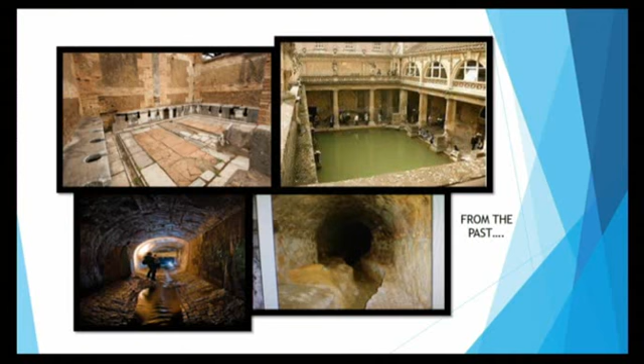Plumbing dates back a long time. As you can see in some of these pictures, the Romans were some of the first people to have a plumbing system. On your brochures, the one on the left is probably a public bathroom they would go into, and the top right would be more like a Turkish bath. The bottom two are some of the sanitary sewer systems - the one on the left is over in England, and the one on the right is the Romans. I can't date that for you, but it looks like they have a trough there to help move things down to a river, which would then get rid of it.

Up to the future - we've come a long way since the Romans to the present time. Who's to say what the future will bring? We have faucets now that you only touch, and some toilets now that you can just wave your hand over and they will flush. So we've come a long way since the Romans.

But plumbers do protect the health of the nation through sanitary and potable, clean drinking water. Our primary concern in our division is the safety aspects of the plumbing system. This covers a wide range of items, from proper venting of each fixture to the proper drainage of the whole plumbing system in every building, house, and dwelling.

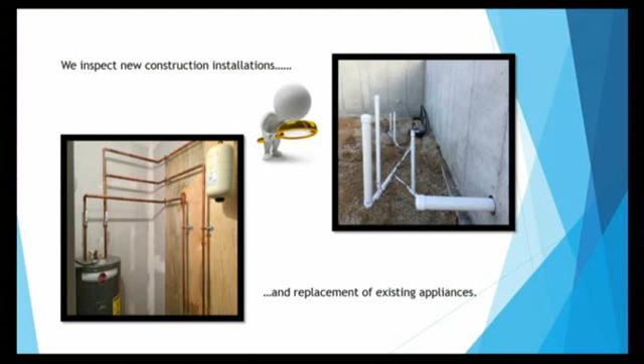On replacement fixtures, I got a water heater there on the left. That's actually a marathon water heater, and they're usually 80 to 100 gallons.

We check for combustion air on water heaters and mechanical rooms, especially on gas water heaters. If there's not enough combustion air in that room, the appliances will not run properly. They'll give off more carbon monoxide, and it will also reduce the life of that appliance.

We also inspect tubs on replacements, and for new faucets installed on tubs and showers, we have to check the temperatures, because all new housing bathrooms, bathtubs, and showers are limited to 120 degrees.

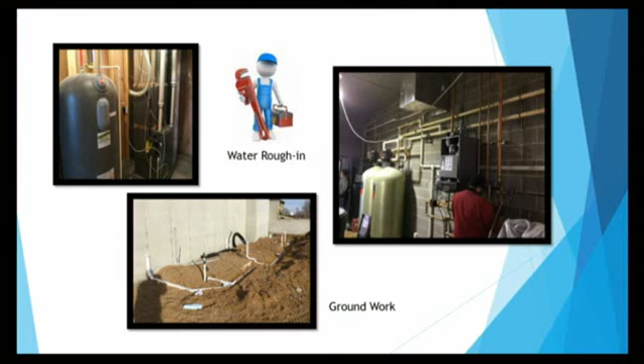With those new faucets, they have a device built into them so that they will do that. On new construction, the maximum temperature controlled by the water heater is a maximum of 140. So if you have 130 at your water heater, these devices will knock it down below that 120. This is to prevent scalding for children and the elderly.

We do not inspect replacements of dishwashers, or if you change out a sink or a toilet. However, if you move them, then we do. So if you add another sink, or move the stool from one part of the room to another, we have to come out and inspect it before it gets covered up. That would require an inspection.

Most of the mornings consist of phone calls with contractors and homeowners, either scheduling inspections or answering questions. We schedule our inspections geographically so as to be as efficient as possible in our daily travels. We leave the office between 8:30 and 9, and return about 4 o'clock to answer emails and phone messages.

Some inspections do not take very long, like a new gas line to a fireplace, or adding a laundry upstairs on the main floor—they only take a few minutes. Other commercial jobs can take as long as an hour. We do not schedule anything longer than that, due to the amount of inspections we have in a day.

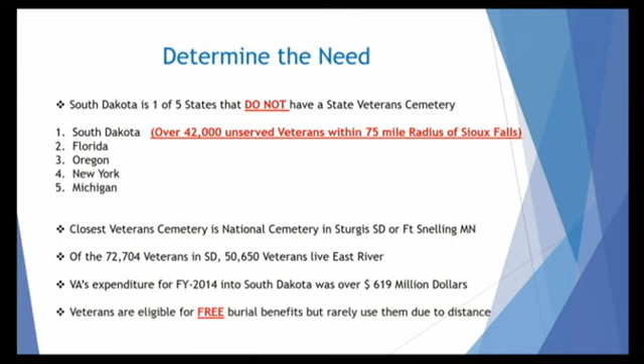South Dakota Department of Veterans Affairs, this is kind of our priority list to make this happen. We need the South Dakota Department of Veterans Affairs to submit a pre-application prior to July of 2018. We're in discussions with them. Last week we were in Pierre talking to legislators. We feel that we have very great momentum going forward with this.

The Veterans Council and legislators have prepared a legislative bill to provide for the design, construction, and equipping of a state veteran cemetery in Sioux Falls, and to make an appropriation therefore and to declare an emergency. The South Dakota Veterans Council is working to establish a special operating fund to help offset any annual operating costs that may exceed the cost of operating the state veteran cemetery.

This has been the main concern of a veteran cemetery. The South Dakota Veterans Council has pursued this for over 20 years, and every year somebody says it costs too much. This year we came to them and said the veterans will pay for it. We just need to find the land and location, and the federal government will come in and build us a $6 million facility to look like Arlington National Cemetery. We're hoping to have that in Sioux Falls either in 2019 or 2020.

We're working with the local and state authorities to procure or acquire land. We're looking at 40 to 50 acres. Sioux Falls meets the federal grant requirements for the veteran population to be eligible for that grant, and they are very excited to work with us. I believe one of them had mentioned to us that if we were on the list last year, we'd have one started already. So we are very excited about that.

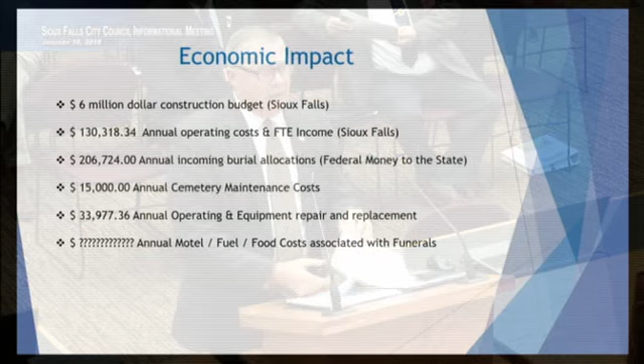The economic impact to the city of Sioux Falls. Currently, the federal government has put numbers together, and it's in your packet, to come in and build a $6 million cemetery, and it will look exactly like Arlington National Cemetery. We are looking at roughly $130,000 of annual operating costs, and that's basically 2 full-time employees,

and then obviously the operating costs of water and electricity and so on. $206,000 annual incoming burial allocations. That's the $749 burial allocation each veteran is afforded to be buried in that cemetery. Based on 276 burials, we would take in an estimated $206,000 to help offset those costs. There again, the $15,000 we're banking on for annual cemetery maintenance costs, and another $33,000 for equipment repair and ongoing operating costs. All of which the full-time employees obviously would reside here, and then the question marks there are the annual motel, fuel, food costs associated with family members coming in for the funerals and so on.

Sioux Falls is looking at a sizable impact if and when this is constructed.

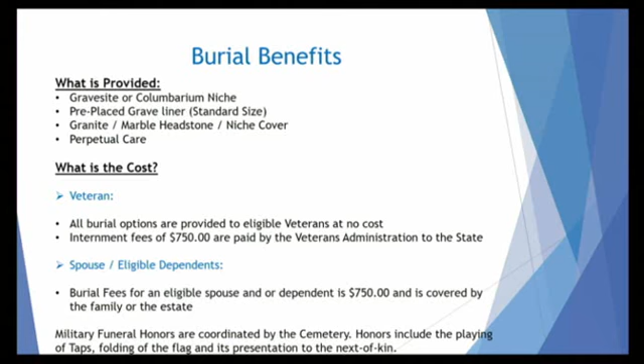That concludes my PowerPoint, Mr. Chairman. I want to thank you for allowing me to talk on this issue today, and I'd be happy to answer any questions. Great, thank you Terry.

Questions for Terry? Councilor Erickson: Thank you for being here. I think this is a really exciting time for our city and our state to partner together on an opportunity such as this. When I was in the legislature 6 years ago, this was a hot topic, and it seems to come up every single year. I'm thankful for folks like you that don't give up and keep trying to find ways to make this work. There's a lot of ways to get things done, and with your diligence as well as other leadership, I know Rex Rolfing and Rick Kiley have been involved in this too. Thank you for that. My question is: what's next? What do you need from us? What can we do to support you?

That's a great question. We're in discussions with legislators out in Pierre right now. Obviously we will not be able to get this done without their support - this will have to pass legislation. We are looking at acquiring land, that is the big thing. Do you have land in Sioux Falls that Sioux Falls is able to partner with you on at this time? We have had some meetings.

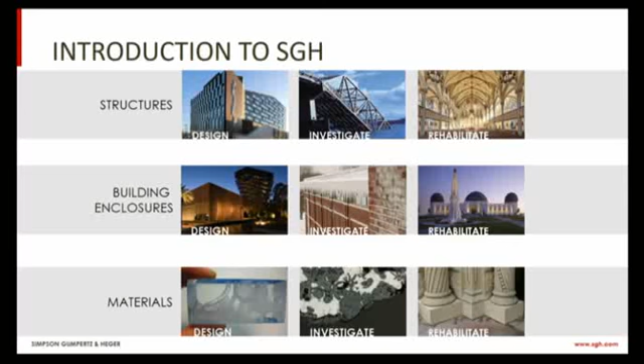Simpson, Gumpertz, and Heger was founded by 3 professors, Howard Simpson, Werner Gumpertz, and Frank Heger from MIT in 1956, who believed that they could do more together as independent consultants than they could in their professional practice in advancing knowledge of buildings and building systems. From the office in Cambridge, we've since grown the company to our current 7 offices across the country as a national engineering firm. Our work encompasses structural engineering, building enclosure engineering, and material science.

Included in our submission on the RFP was several projects where we've done work in the past on metal panel systems, and I'm showing 3 of them here where we have designed metal panel systems, investigated the failures of metal panel systems, and done rehabilitation on metal panel systems.

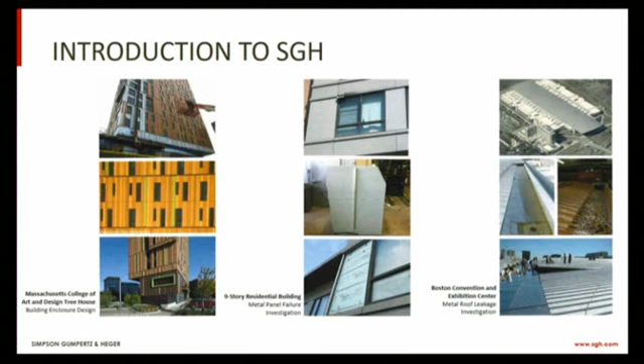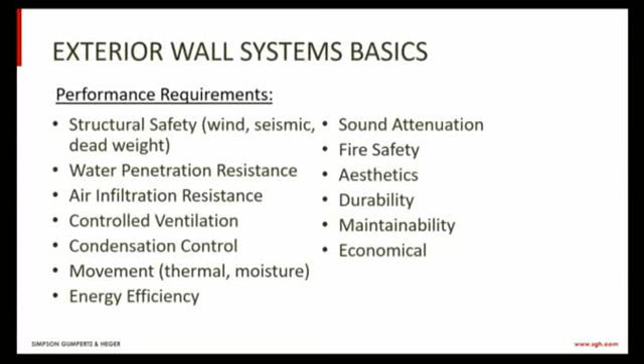With that, I want to jump into some exterior wall system basics. We ask our exterior wall systems to do a significant amount of work on a building, so it's important that they are designed properly and installed properly. But from a basic standpoint, there are 4 barriers that the exterior wall system encompasses.

The first is waterproofing. We call that our barrier 1, and that is to prevent rainwater or groundwater, if it's below grade, from entering the structure. The remaining three barriers, insulation, vapor retarder, and air barrier, control condensation potential within the wall system and control the energy consumption of the building.

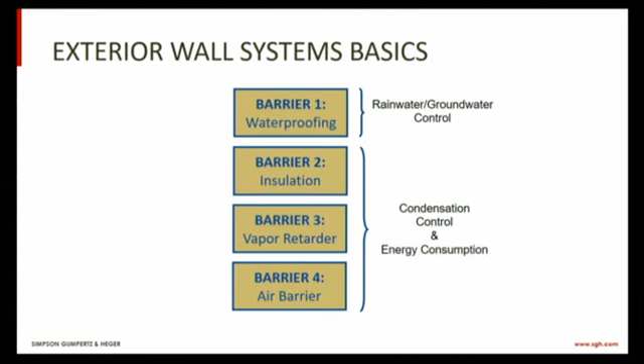There are two basic wall systems out there. The first is a barrier wall system, which you can see on the left. Essentially, in a barrier wall system, the exterior plane of the wall is your barrier to everything getting into that wall system. Once it's penetrated through the exterior plane, water can move freely through the wall system.

In a cavity wall system, which is the other predominant wall system on the market, you have a cladding material that deflects the majority of the water. Incidental water is expected to get through the cladding, enter a cavity where it is collected and drained to the exterior. You can see that in the illustration here.

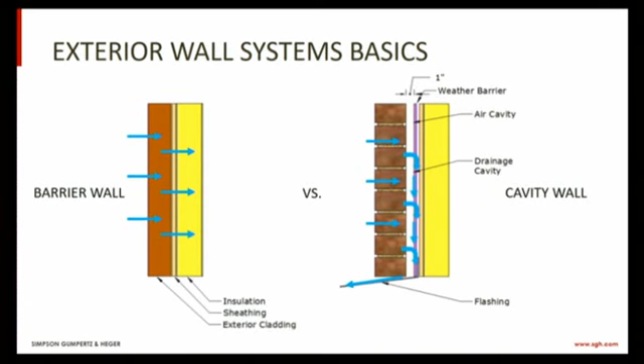To give you one that's more based on metal panel and more of a three-dimensional view, you can see there's a metal panel rain screen system which deflects your bulk water. There is a cavity behind it that's created by the horizontal and vertical girts that support the metal panel system that lets the water collect and drain out to the exterior. Then you have the remainder of your system: the insulation, the waterproofing membranes, the vapor retarders, and the air barriers.

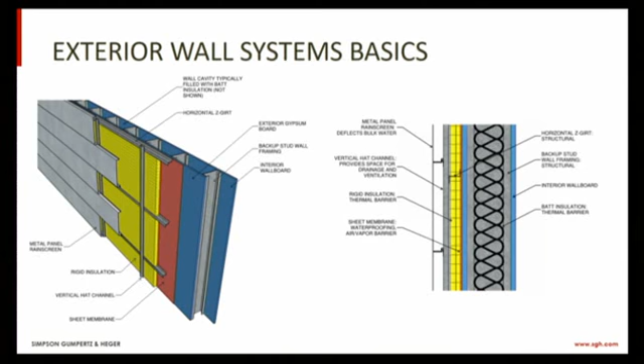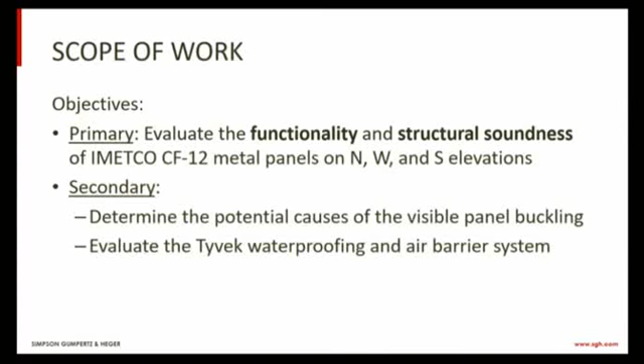So let's talk specifically about the Denny Sanford Premier Center and our work there. The objective of our work was to evaluate the functionality and the structural soundness of the IMETCO CF12 metal panels on the north, west, and south elevations. Secondary objectives of our assessment were to determine the potential causes of the visible panel buckling and to evaluate the waterproofing and air barrier system behind the panels.

In our response to the RFP, we explicitly stated we were going to do a non-destructive visual assessment of the panel system. Based on the review of the information provided in the RFP, this seemed the most appropriate way to go about doing this. There would have been no information indicating that anything destructive was required.

In addition, a destructive investigation would require opening up the wall system, cutting through the panels unless you are to unzip it. The panels are put on in such a way, which we'll see further on, where they start in one corner and work their way across and down, kind of the reverse of putting siding on a house. In order to pick random selections throughout the wall system, we would have had to cut open the panels, and then patch the panels. It would have left an aesthetic that may not have been architecturally satisfying to the city.

We began our work with a review of the available design documents, reports, and construction photos that were pertinent to the IMETCO CF12 metal panel system. We conducted a 2-day site visit where we made observations visually from the ground and from low roof areas.

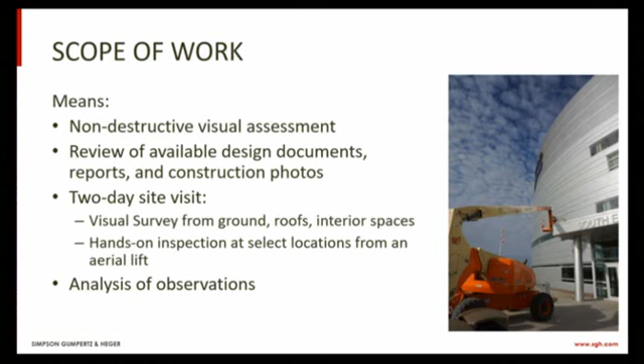We also did a walkthrough of the interior spaces to look for evidence of leakage that may be occurring, particularly at the opaque wall system behind the IMETCO CF12 panel. We also did a hands-on inspection using an aerial lift, and then we completed an analysis of our observations at our office and issued our report.

So the metal panel wall system on this building, as designed, is essentially a rain screen system. It has a metal panel that deflects the bulk water. It has a sheet membrane that is your waterproofing and air barrier behind it, and it has a spray foam insulation that acts as the insulation and the vapor retarder for the wall system. So we see all 4 barriers in the design of the wall system.

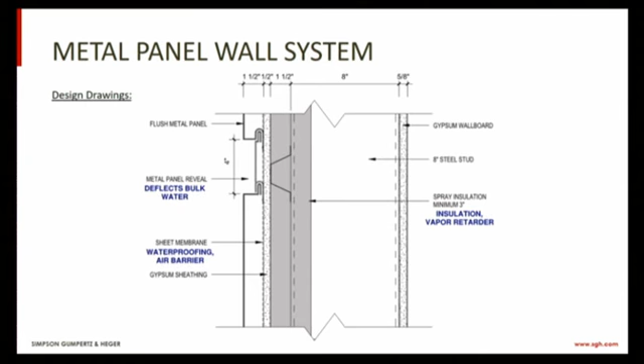We take the design and it's used by the contractors to develop shop drawings, where again we see that the design intent is met here, where the metal panels deflect the bulk water. We have a cavity that we did not have in the design introduced here, again to manage any incidental water that gets behind the metal panel system. It's created by vertical hat channels that you may or may not be able to tell, depending on how familiar you are with reading drawings, but there is essentially a cavity that's created by them.

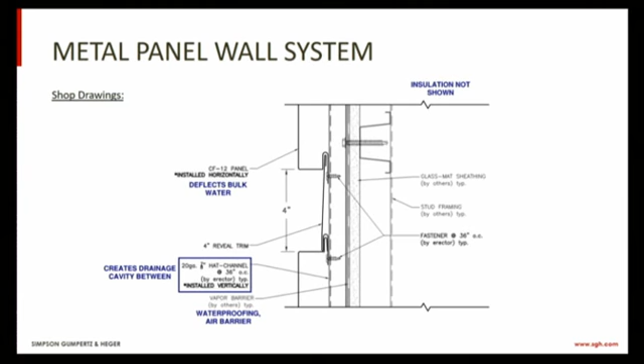And then we have a waterproofing air barrier shown. Noted on this drawing is vapor barrier, but that is incorrect. That's the insulation—the spray foam insulation is performing that task, which is not shown in this, which is typical because that's not the metal panel person's purview.

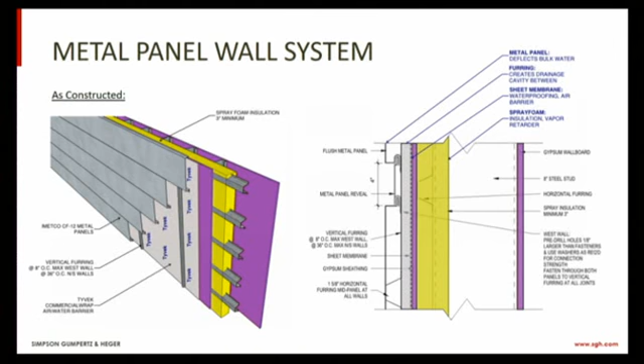Here's your as-constructed 3-dimensional image and section through it, showing again that you have a metal panel system acting as a cavity wall where it deflects bulk water. The vertical furrings create cavity drainage space. The Tyvek waterproofing performs the ability to collect that water and turn it out at the flashings on the building, also acting as your air barrier, and then the spray foam insulation being the insulation and vapor retarder.

So I wanted to take you through a couple of photos that we received as part of our review of the construction on the building. Here is the Tyvek system on the left and the metal panels system on the right. You can tell there are two different types of metal panels. The upper panels are corrugated and are not included in our review. The lower panels are the IMETCO CF12 flat metal panel system.

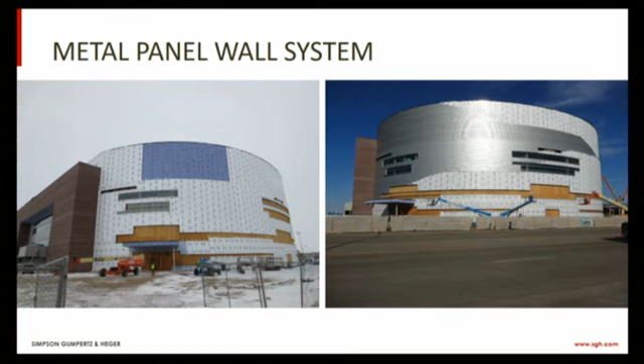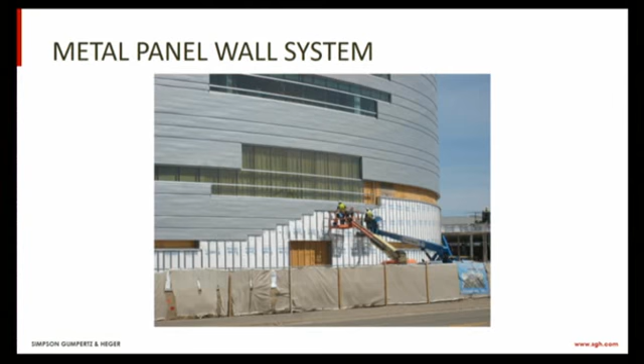We had some very good photos showing it go in. This is the zippering effect where they basically start from the left-hand side, working their way across and down. To make an opening, you either cut through a metal panel or you have to unzipper to get to the point where you want.

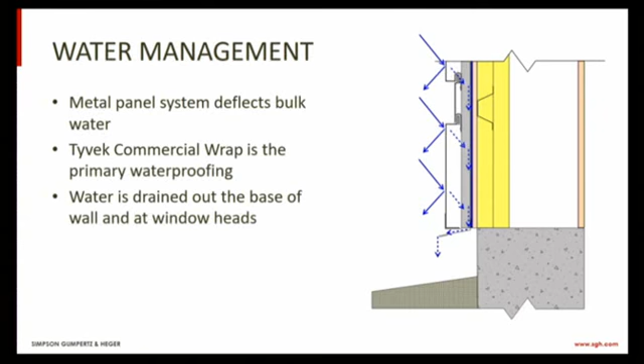Water management on this building is basically, as I've mentioned before, the metal panels deflect the bulk amount of water. Any incidental moisture that gets through the panels, through joints and whatnot, is collected in the cavity space by the Tyvek and turned out at flashings that exist at the tops of windows, at the window heads, and at the base of the wall. So here's examples of those flashings on the building.

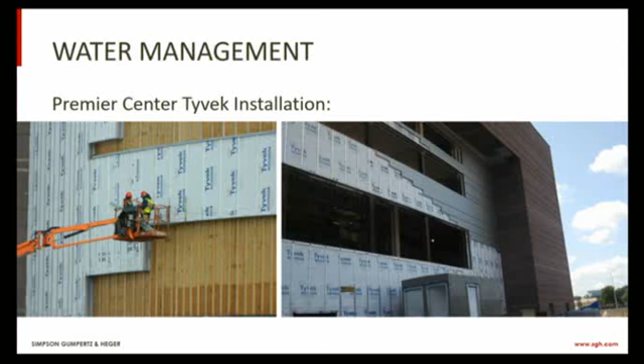The water management system, again, is the Tyvek weather barrier that is behind the panels and behind the girt system. We evaluated it using photographs from construction. This is a very good Tyvek installation. We look for things like flatness of the Tyvek, seaming, wrinkles, and generally speaking, this is a very good installation from our analysis of the photographs.

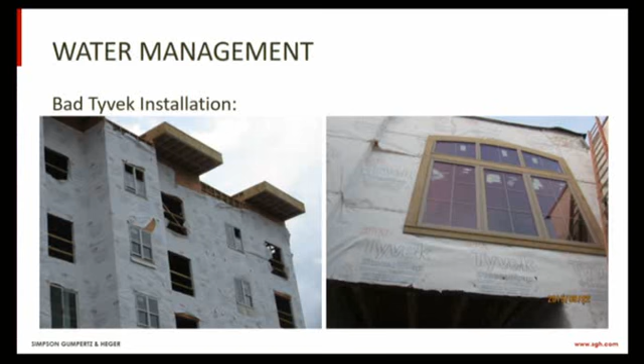To give you an example, here are two projects I've done in the last 2 years. These are Tyvek installations in progress. You can see that in these cases, this is what we would call a bad installation. The contractor is not taking the necessary care with the Tyvek system to make sure it is continuous and will do the job it needs to do behind the cladding system.

Field observations: quickly, we made interior observations. I'll call attention to essentially two locations mentioned in the report that do not pertain to the IMETCO CF12 systems, but were areas where we observed past indications of water, on the aluminum curtain wall system. We see water streaking on interior mullions. Could be from construction, could be from condensation, could be from water leakage. We can't tell. We brought it up as an informational item for the city, since we did observe this.

The second location is the opening in the wall up in the mechanical space, which is actually behind the corrugated metal panel system. We did go up there, we did look at it. It has been termed historical leakage; nobody has seen leakage associated with this in 3 years. We wanted to see it primarily because it was an opportunity to see wall construction and verify that, even though it's at a different section of the building, the wall construction is generally per the drawings.

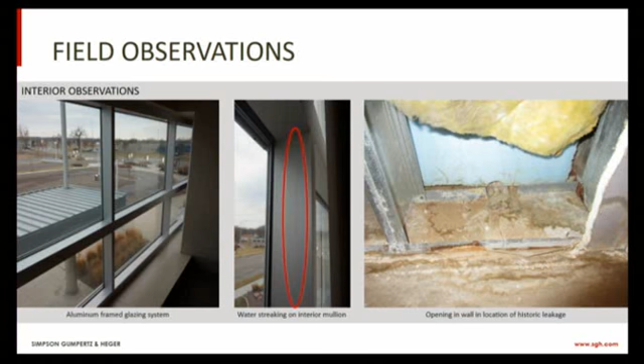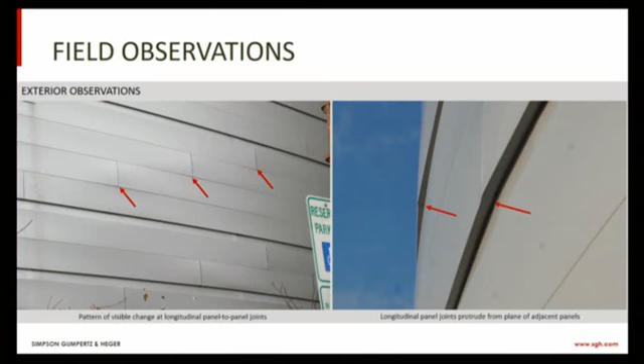From the exterior, you can see the visible change pattern at the longitudinal panel-to-panel joints going around the building. I believe this is what necessitated the need for the assessment. You can see how those end joints are lapped together here. One piece of panel is essentially folded and inserted behind the adjacent panel.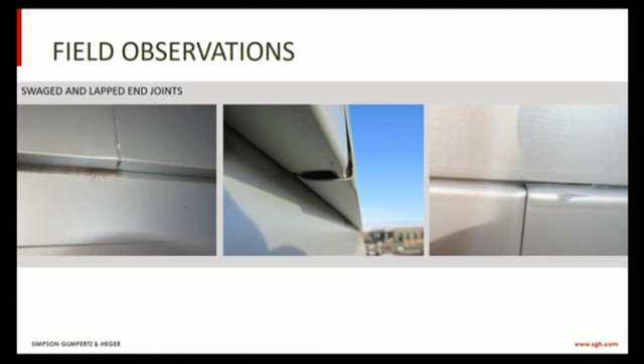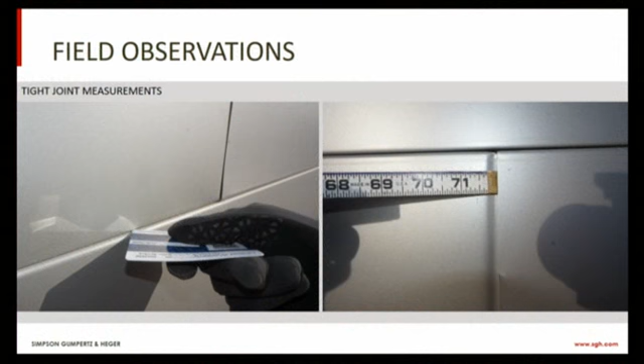The joints are tight. We did try to measure them, trying to put through essentially a credit card type item. You're looking at something on the order of maybe about 10 or so sheets of paper in thickness that we're trying to put through there, which is about 0.04 inches. So not very thick, but the panels are tight together.

We did observe staining coming from primarily the reveals, and this was hit or miss throughout the elevations.

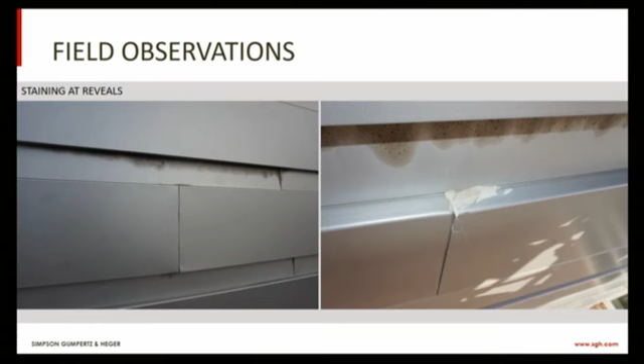We did some qualitative testing on the metal panel structural integrity. We had some suction cups and were attempting our best to pull the panels essentially off, to see how much we could deflect them. This is the worst one we could do. We could open the panel slightly here, about 1/4 of an inch that we're able to deflect the panel. It then returned to its previous position.

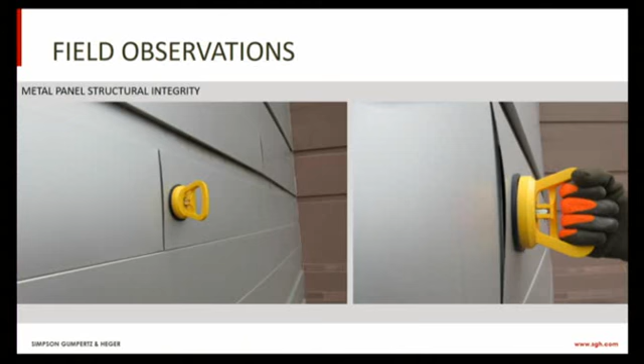We did note some loose trim pieces that existed on the building, primarily at window jambs and a little bit at window heads, with trim rivets that were either not fully installed or pieces of trim that were not fully anchored in place.

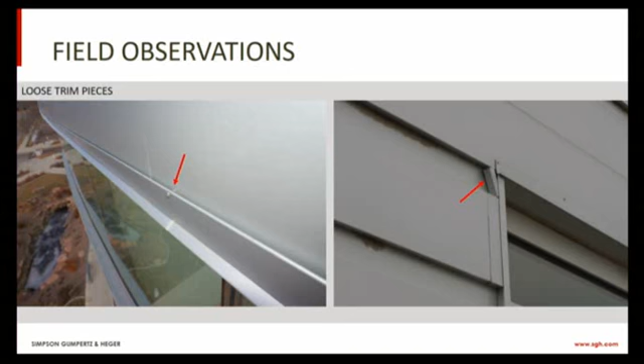We did a structural analysis on the panels to confirm that they are attached to the building in a manner that we are not concerned about them pulling off. We looked at pull out of the fasteners and pull over of the metal through the fastener, essentially where the fastener stays in place and the metal pulls over around it.

We based everything off of the fasteners that Dalsin provided to the city recently as essentially attic stock material for the center. We looked at the different spacings that were available on the support structure behind the panels, and what we did is we calculated what the actual capacity is and compared it to the actual forces that are on it, and we developed a factor of safety.

In other words, how much extra capacity do we have over the demand that the panels are under. A factor of safety of 1 means the capacity and the demand are equal. A factor of safety of 2 means you have twice as much capacity as the demand. The industry standard is to have a factor of safety of 3 for these panels. You can see that the factor of safety that we calculated is above 3 in all cases.

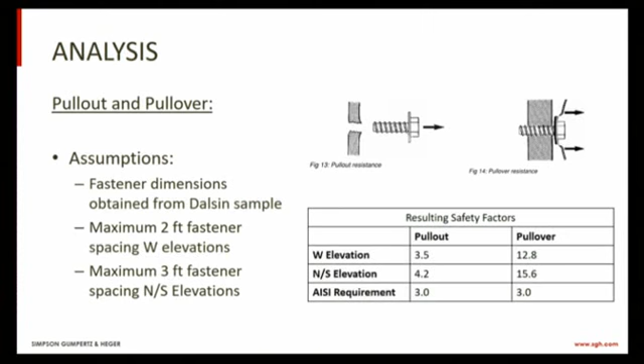We did an analysis on thermal expansion. The specifications required that the panels accommodate thermal expansion for an 180-degree temperature swing. We did our calculations to determine what the amount of movement would be expected and whether or not the end joints of the panels could accommodate it or whether or not they would contribute potentially to the buckling of the panels.

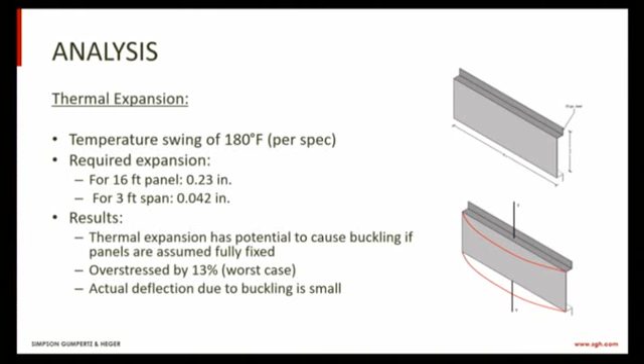We found that in the very worst case, a full 180-degree swing, the panel would be overstressed by approximately 13%. That is not necessarily a point of failure, but the amount of deflection that it is holding up is approximately 0.04 inches, again about the thickness of a credit card or 10 sheets of paper. And what happens is that inability to deflect at the end joints creates stresses, which then can lead to the buckling that we see on the panels themselves.

In addition, the way that these panels were formed on the building also creates the potential for a weak point where the buckling can then take place due to the expansion. These are panels that went on as a flat panel system and were curved in place by fastening them to the support structure underneath rather than being pre-curved.

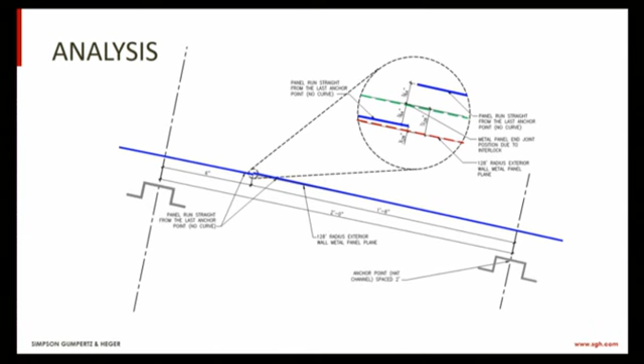As you can see from this illustration, we took a panel joint where you would have a 6-inch extension of the panel past one support on one side and a 1.5-foot extension of the panel from the support on the other side at the 2-foot support locations. Essentially, they're trying to bend those together so that they could nest one panel inside the other to make that end joint. As a result, as you can imagine, that creates a slight weak point where you can then have the stresses from the thermal expansion result in the buckle that we see on the building.

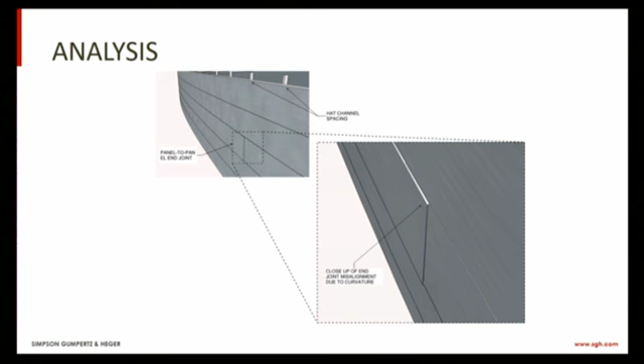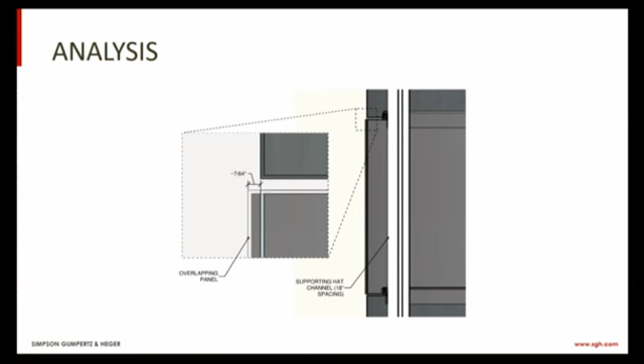Here it is illustrated. You can see it's just going to be slightly out of plane as a result, with the panels above and below which are more centered on panel curvature. You can see that's approximately 7/64 of an inch by our calculation on the worst case scenario. And here you can see that reflected in the actual photos that we see.

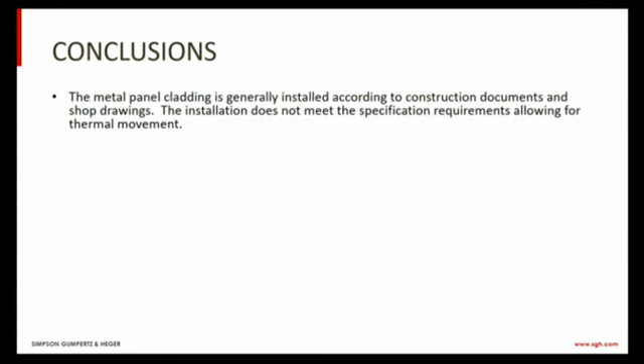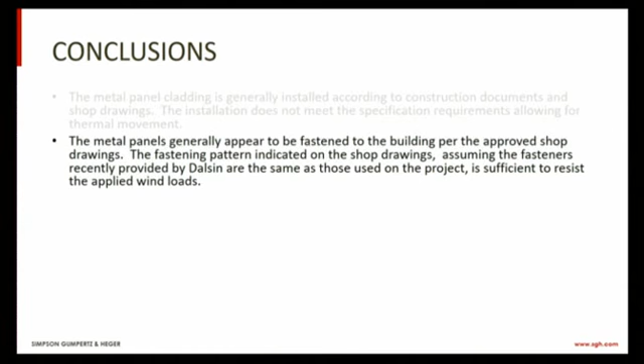So conclusions and recommendations, these come straight from our report. The metal cladding is generally installed according to the construction documents and the shop drawings. However, they do not design a joint on the end panel joint that could accommodate the thermal movement that was specified. They generally appear to be fastened per the shop drawings, and the fastening pattern used and the fasteners that Dalsin says were used and provided to the city as attic stock are sufficient to resist all applied wind loads.

There's no reports of leakage into the building. Water and air leakage do not appear to be occurring through the building enclosure at the IMETCO panel locations and the opaque wall systems. We do recommend that the window system be monitored to confirm that the stains we observed are not active leakage.

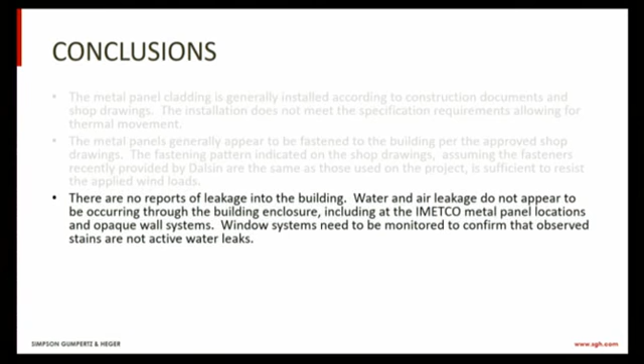The visual appearance of the warping, buckling, or bulging at the joints is most likely due to the lapping of the flat panels around the curved building. The tight transverse and longitudinal joints between the panels contribute to the appearance of buckling due to the thermal expansion. To avoid this appearance, the panels would need to have been pre-curved.

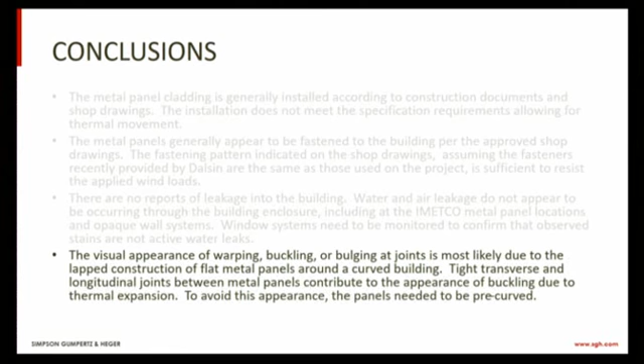We recommend the following: that the loose trim components be secured to the building, and that they either be set in sealant or mechanically attached with rivets and screws. We did not identify every piece of loose trim on the building, so that should be done as part of the work when they go back to reattach these.

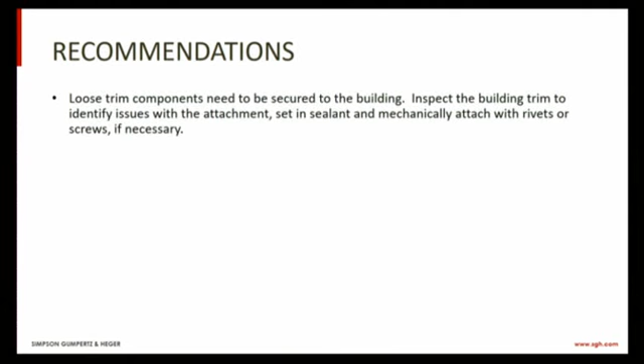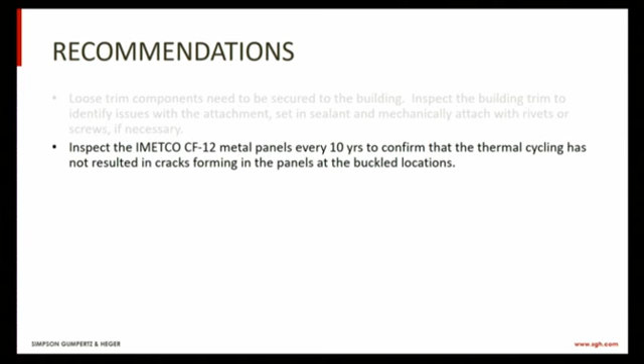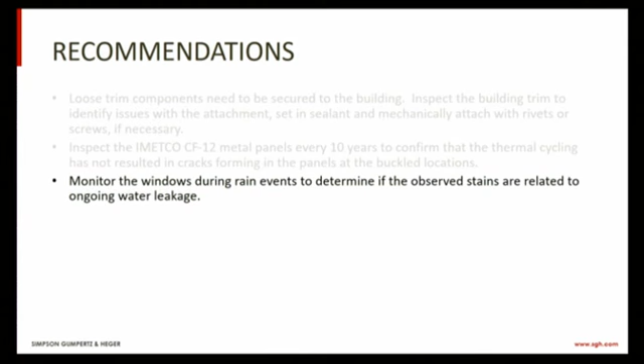We recommend that the panels be inspected every 10 years to confirm that thermal cycling has not resulted in cracks forming in the panels, particularly at the buckled locations. We recommend that you monitor the windows during rain events to determine if the stains we observed are related to ongoing water leakage at the windows, or if they are from construction, condensation, or some other cause. And we recommend that the residue, a butyl residue on the surface of the metal panels, be cleaned as described in correspondence from IMETCO provided during the project timeframe, and that we monitor it for reoccurrence.

With that, I know I've presented a lot of information. I'm open to take questions. Thank you very much for your time.

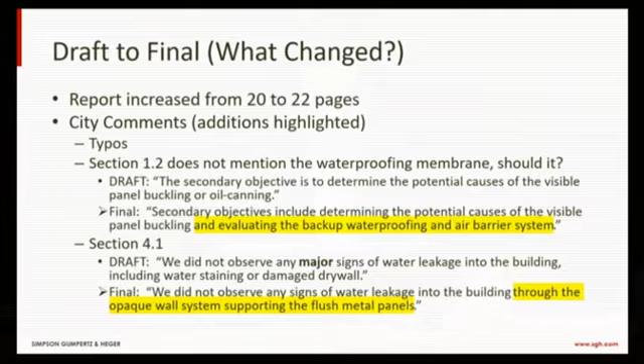Okay, very good. And so obviously you stand by the accuracy of the report? Yes, sir. And were you asked, or did you remove anything negative or embarrassing at the request of the city? No.

Finally, I will just point out, for clarification for everybody, the methodology in the RFP essentially let the proposers propose what they would propose to do. It didn't say that they would have to remove a panel or anything specific. We left the expertise to them to tell us what they thought they should do.

And yours was kind of a step-by-step approach: let's start with taking a look, and if there's something that merits or necessitates it, we go to the next step. I'm taking from your results that you don't see anything that would necessitate that it would be money well spent to start taking panels off or removing walls. The evidence just isn't there to support that. That's correct. Thank you.

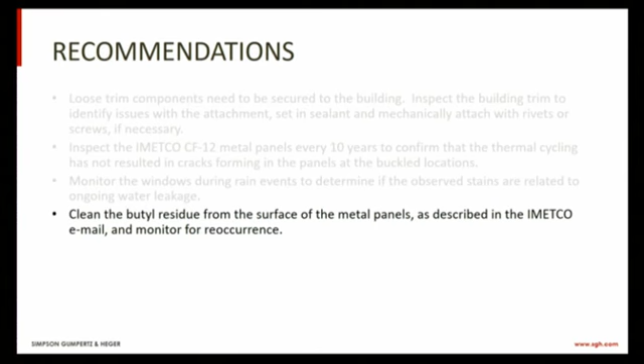Inspecting the panels every 10 years means that the operator goes out and requests somebody to come in and do an inspection. That could be an engineering firm, whether it's somebody outside of the area with no tie to the project, or a local internal Sioux Falls engineering firm, or a contractor or other city employees knowledgeable about the issue, which is looking for the potential of fatigue and cracking of the panels at the bulge locations.

Thank you. You're welcome. Okay.

I've got then with that, I've got a question. Were we going to have Mark Cotter come up too? I think, oh yes, we're not done. Okay, if I, because I have a number of questions of my own too, so with the council's permission, I'd like to ask a few. Maybe Director Cotter, this would be a great follow-up to Councilor Starr's question, because I sent that question to you yesterday evening. Has the cost of completing these recommendations been estimated? And can you also respond, because I think we're going to find the responses are going to be very similar, but also, how do you perceive them being budgeted and dealt with?